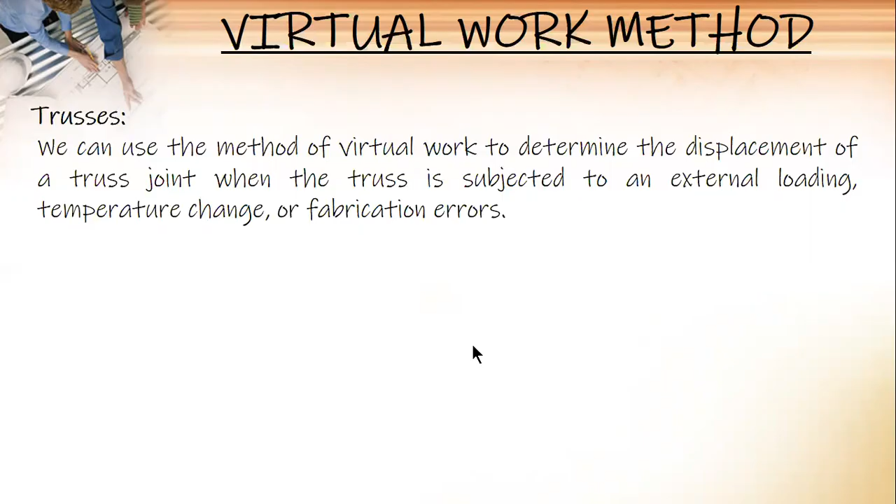This is the virtual work equation. 1 times delta equals summation of n times N times L over AE. Okay. So 1 is the external virtual load acting on the truss joint in the stated direction of delta.

So similar sa beam o frames, depende sa mga analysis or assumption mo. Like for vertical displacement, if you think the joint will be displaced downward, then ang unit load nimo downward. But for horizontal displacement, if you think nga ang joint will be displaced to the right, then you apply a unit load directed to the right also. And after solving, if ang sign is negative, it means na opposite nga direction ang actual na displacement.

Small n, internal virtual normal force in a truss member caused by the external virtual unit load. Okay, so ang small nga n, force ni siya sa truss members due to the unit load. Ang delta, mao na siya ang joint displacement, either vertical or horizontal, depende sa gipangayo sa problem. Capital N, internal normal force in a truss member caused by the real loads. L, length of the member. A, cross-sectional area. E, modulus of elasticity of a member.

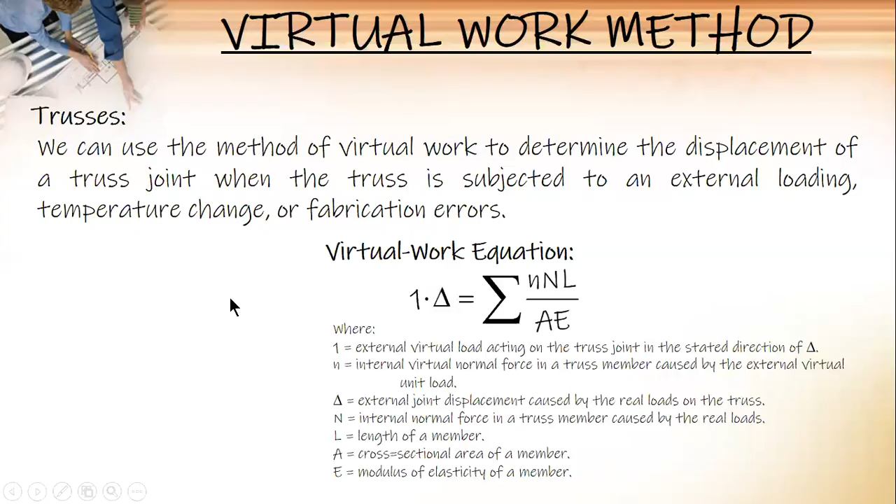So example, to illustrate, you have this truss and you are interested in determining the vertical displacement of joint B, this one. So, mao ni ang real loads. So, compute nimo ang bar forces of all the members. Mao na imong capital N.

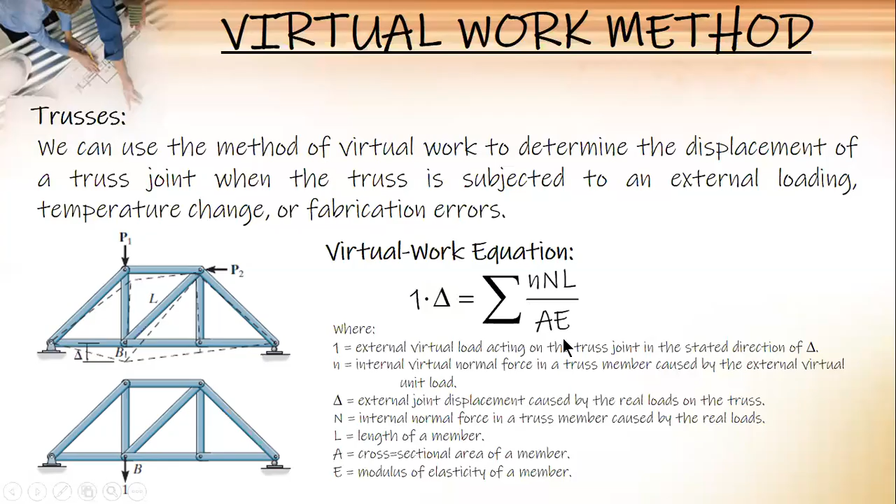And then after that, you place a unit load sa joint in the direction of delta. So, since imong assumption that joint B will move downward, then you will apply a unit load at B downward. So, dili na nimo i-consider ang real loads, unit load na lang. And then solve again for the bar forces. Okay. And then substitute in that equation. So, mao ni ang procedure for analysis.

So, for virtual forces n, place the unit load on the truss at the joint where the desired displacement is to be determined. The load should be in the same direction as the specified displacement, either horizontal or vertical. Okay. Pero kung right or left or downward or upward, okay ra mag-assume. And then i-check na lang ang sign sa final value. Kung positive, then ang direction nimo correct. Pag negative, opposite.

So when a unit load is so placed and all the real loads removed from the truss, use the method of joints or the method of sections, and I will include my labay-labay style, joke lang, and calculate the internal n force of each truss member. Assume that tensile forces are positive and compressive forces are negative.

For the real forces, capital N, use again the method of sections, method of joints, or Neri's labay-labay style whenever applicable, kay naa may mga joints nga dili pwede. So whenever applicable, you can use my style to determine the N force in each member. So these forces are caused only by the real loads acting on the truss. Again, assume tensile forces are positive and compressive forces are negative.

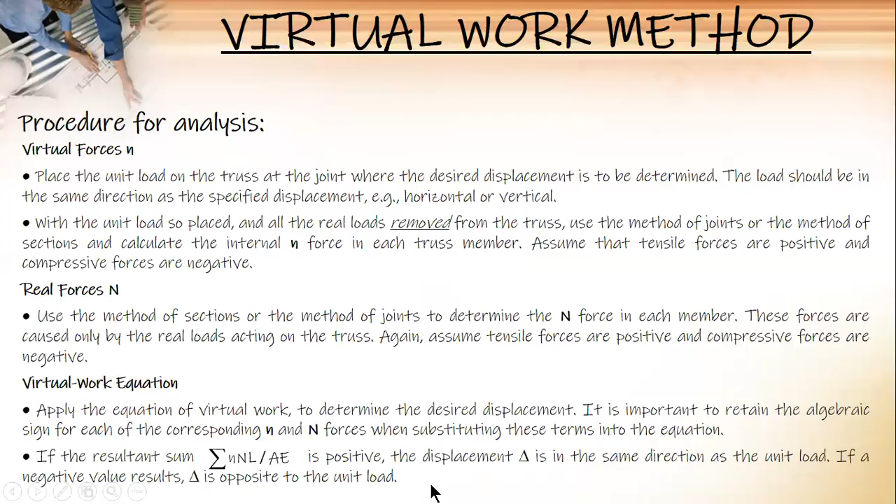Okay, so let us solve a sample problem, a simple problem. Determine the vertical displacement of joint E. For each member, area is equal to 400 millimeters square, E equal to 200 gigapascal. Use the method of virtual work.

No? Pero for general lang, kini problem, nga wala sa center, gamit ani summation of moment sa A, masolve ni mo ang reaction sa C. So it's RC times 4 minus 45 times 2. And na kay RC na 22.5. Summation of forces sa Y, RA equals 22.5.

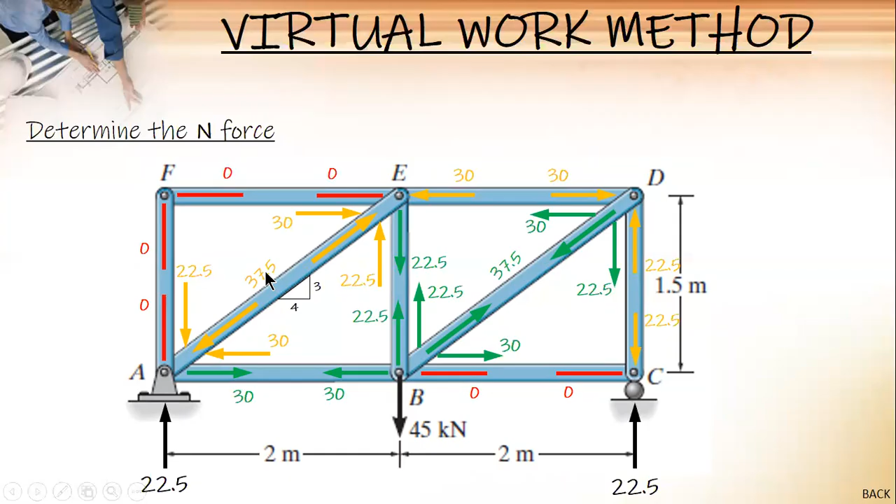And then for capital N, for loads, you have 30, negative 37.50. But since our load is in kilonewtons, convert 30 to newtons. So this will become 30,000. This one is 37,500, and so on.

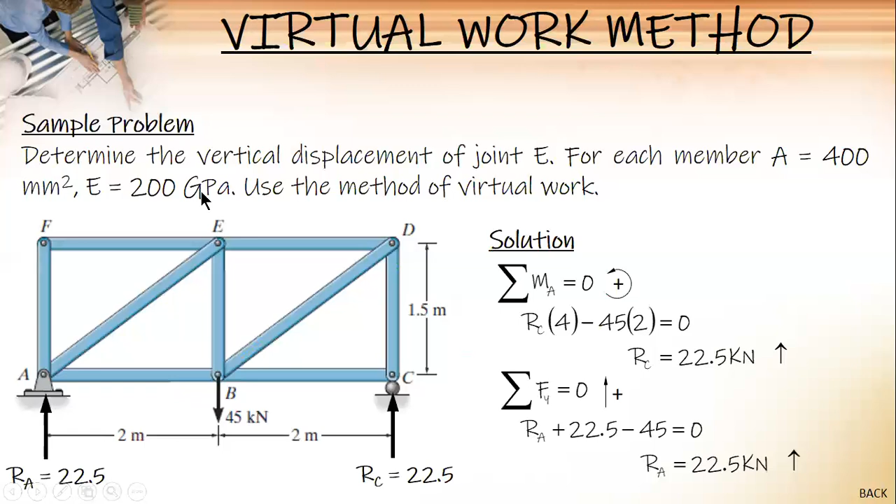And then L, 2 meters becomes 2,000 millimeters. Area is given, 400 for all members. And then E is 200 gigapascal, so to get megapascal, multiply by 1,000.

After this, compute for nNL over AE for each member, and then add them all, summation. Multiply n times N times L: 2/3 times 30,000 times 2,000. Multiply those three, then divide by the product of A and E. The result is 0.5.

And then you do the same for the other members. For AF, it's 0. Then product divided by product, and so on. The last is also 0. Finally, delta is the summation of nNL over AE. Add all the results, and the unit is millimeters.

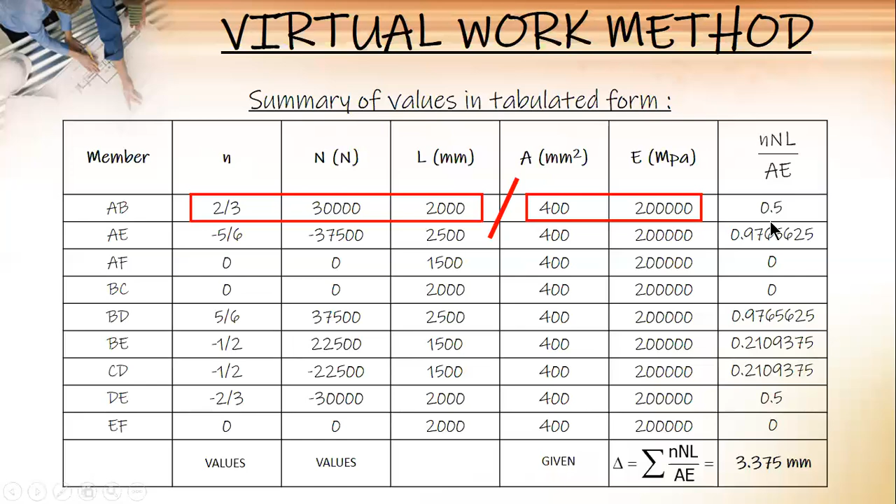Okay, so you can solve other problems to master the virtual work method.